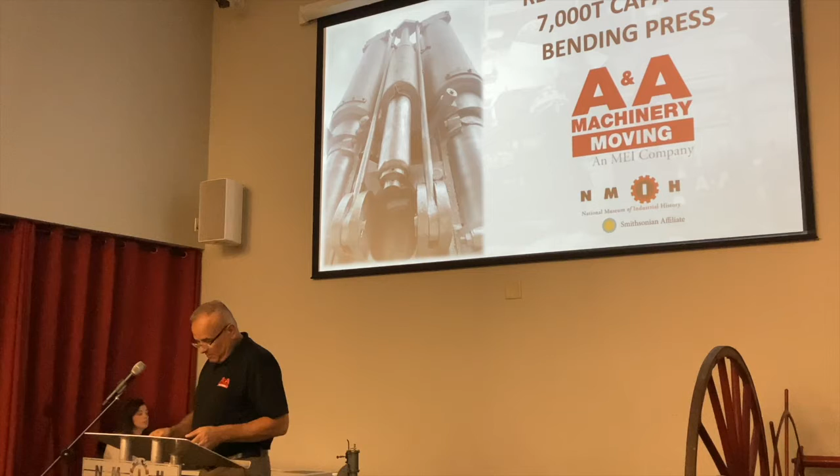Mike, thank you for the history. I've learned some of the history as we were going through relocating the press, but I was excited today to come and learn more of the history about what was going on. So that said, we're going to advance through the first 3 slides because I think Mike covered it pretty good.

As we talked about earlier, the press was in the traffic circle over there outside of the Sands Casino, and it was about 100 feet from the entranceway to the casino. So talking about the way that they were going to move the press or scrap the press would have caused a lot of disruption. If anybody has ever seen using an oxygen lance or cutting a heavy piece of metal like that, they probably would lose vision of the front entrance in that process because of the smoke clouds that would come off of it.

The proximity to the front of it was an issue, and then also getting it through the facility. Go ahead and advance to the next slide.

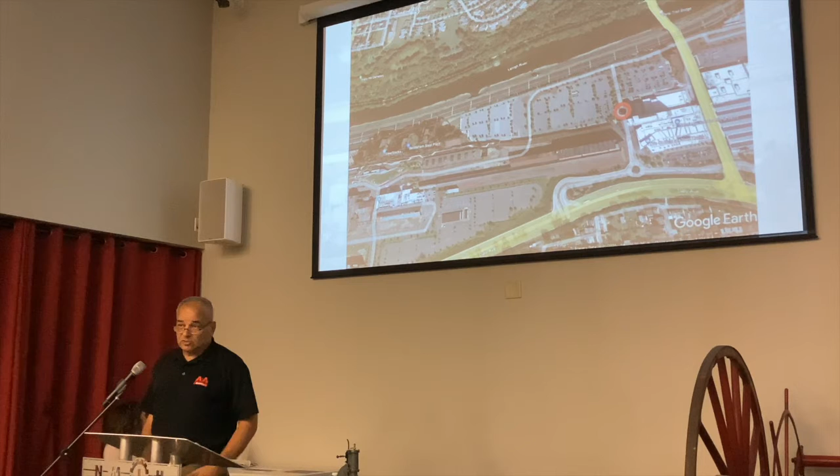So we were starting, I'll try and stand off to the side, maybe that'll be a little bit better. We're starting from the traffic circle over by the press, and then we were going to move here to the museum. One of the important things of moving it is we couldn't get on a public road because of the amount of weight that was being moved and the load on the streets and stuff. You couldn't go over any bridges, couldn't do. So I know we were originally talking about a couple of different locations of possibly moving the press to, and the location here was the best for us to be able to move it to.

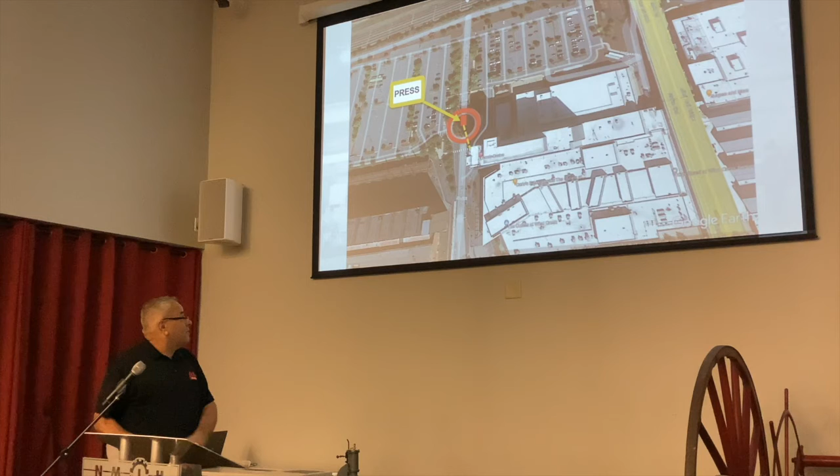Go ahead and advance to the next slide. This is the existing casino location, and I would say everybody that's here is probably familiar with it. Next slide. And there we are. You can see the proximity to the entrance to the casino. Next slide.

We talked about the press earlier, and there's different components to the press, and we're going to break that down. This is one of our original meetings. This was shortly before we met with

Wind Creek Casino, and I'll elaborate a little bit on that meeting. I think it was Andrea, Kara, and Charlie, we went to the meeting, and they had a team of engineers there to tell us why we couldn't move the press and how we couldn't move the press. They said the ground impact as we passed the different buildings here would affect the buildings, and if we picked it up with the forces on it, the crown would crack and break.

It already had some cracks in it. And traditionally, when you're taking a press like this apart, you're taking it apart to put it back together. So you have to take the crown off of the columns. And if it twists at all, or as this one sat outside in the rain for 20 or 30 years, there'd be a lot of corrosion.

It won't come off the columns easily. But we had come up with a technique to go ahead and cut the columns and be able to weld them back together. It wasn't going back into production, so that gave us the ability to do that. And so we were able to pick the crown with the columns, which didn't require that extra force.

For example, we did the 3,000-ton press over at Lehigh, and we ended up with 12,000 tons of jacking pressure to get the crown to come off of the tie rods. And that was a press that was in operation up until they shut it down. So some of their arguments would have been valid, except they didn't have alternate approaches of how we did it.

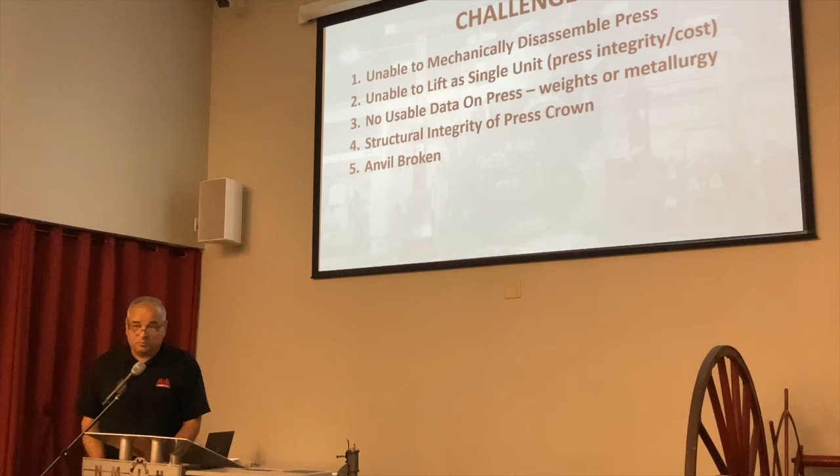And then materials. So we didn't know what our materials were. We didn't have any documentation. So different welding procedures - you can't just weld to anything. You have to know what you're welding to. You have to have a certain procedure.

We asked Lehigh Heavy Forge to send over the metallurgy people. We took some samples out of it. They did some sampling for us so that we could determine what was the carbon content, what was the material that we had, and what welding procedure we could weld to this to have it stick and work. Because for any of you that know, you can weld a piece of steel to a piece that doesn't match and hit it with a hammer and it'll fall off - let alone pick up 100,000 pounds with a lifting lug that you're welding on.

And then routing - we had to come through, and it was difficult how we were to get through. We went through 2 shops here. It was a real narrow passage, and they were concerned about the weight, the concentrated load of the heavy crown affecting the foundations of these buildings that were barely standing on their own. You could see, I looked in the buildings and you could see it shifting, the building shifting on the foundations. But thanks to the team, they had engineering studies done and everything that proved that to be safe.

And then the media event - we're 100 feet from the front door of the casino, and we have full surveillance every time you do everything you do. But it worked out well.

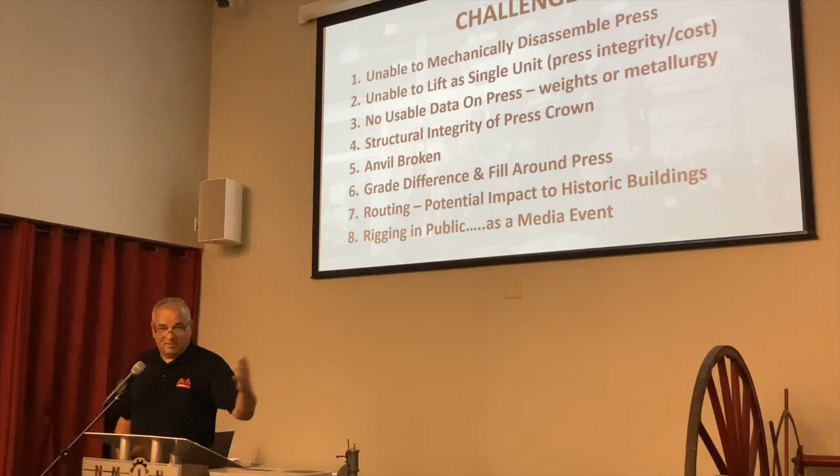We kind of had a pen area where the newspaper reporters and people were. Tony, sitting in the back on our team here, did me the favor to come and manage that so the team didn't have to manage doing the job as well as answering the questions. So it worked out well.

Next slide. So here we're talking about the components. For those that don't know the components, here's the crown of the press. These are the cylinders and rams. So the rams would be the black part, and the cylinder would be the piece up in the crown. So the crown is a big block on the top, and there's actually cylinders inside there that is the piston. The moving crosshead, that's the piece that does the work.

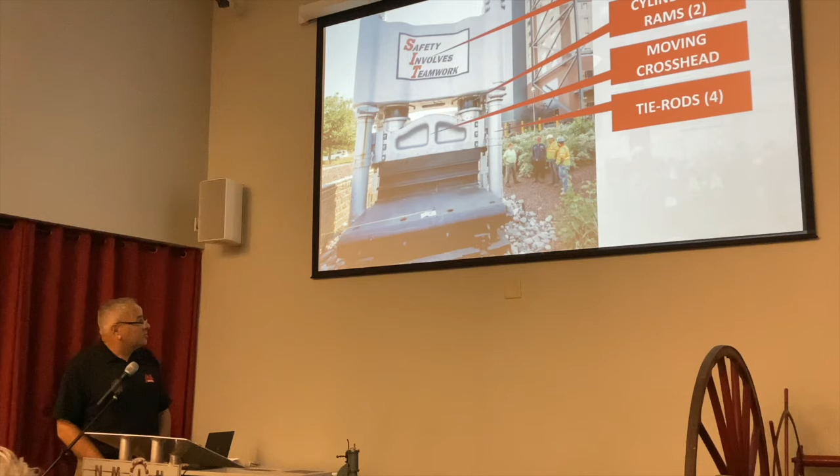There's 4 tie rods or columns, and they actually, at ground level, go in the ground about another 12 feet through the base, which was abandoned underground. So what was the base? Was it a big steel base, or was it concrete and stone? No, it was a steel base. How thick? I don't know how thick it was.

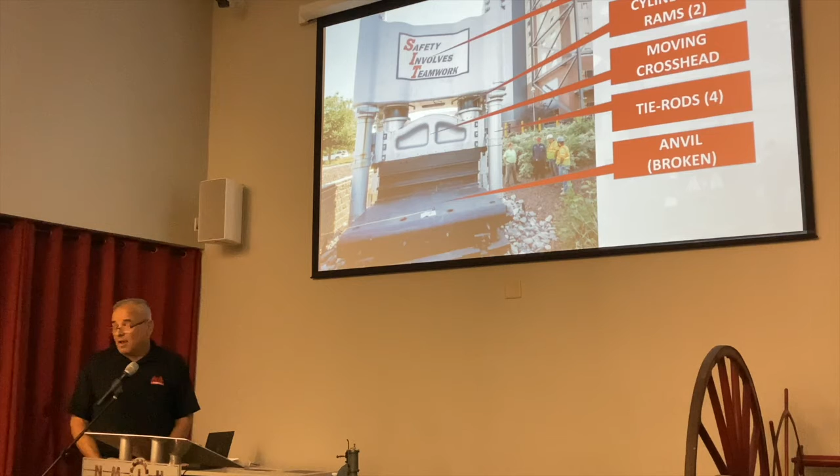We just saw the bed plate on the top of it. It was different. I understand that they may have removed it at some point in time when they built the casino. Yeah, they had to break it up, so they had a team come in, heavy jackhammers. So the anvil is all the work is done on top of. Okay, and then the base, which was below grade.

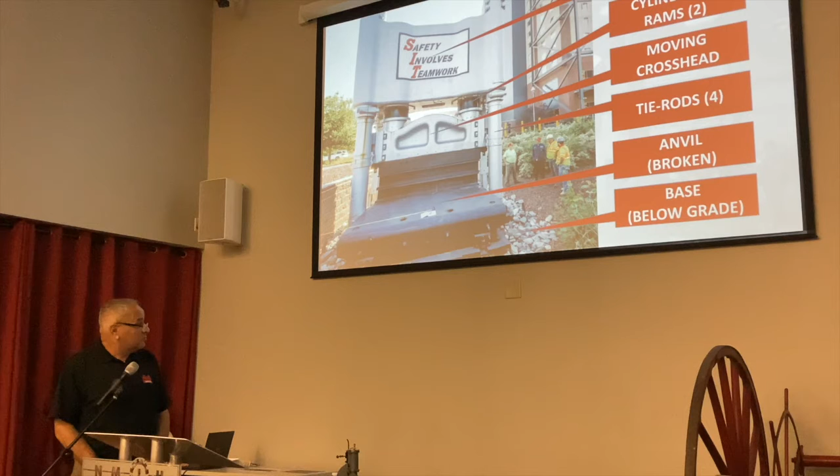If you look out at the unit out here and you look at the concrete, that concrete was made in the shape of what the base would have looked like. The upper nuts, the next intermediate upper nuts, the lower intermediate nuts, and the bottom underneath the ground would have been the lower nuts, or the bottom nuts.

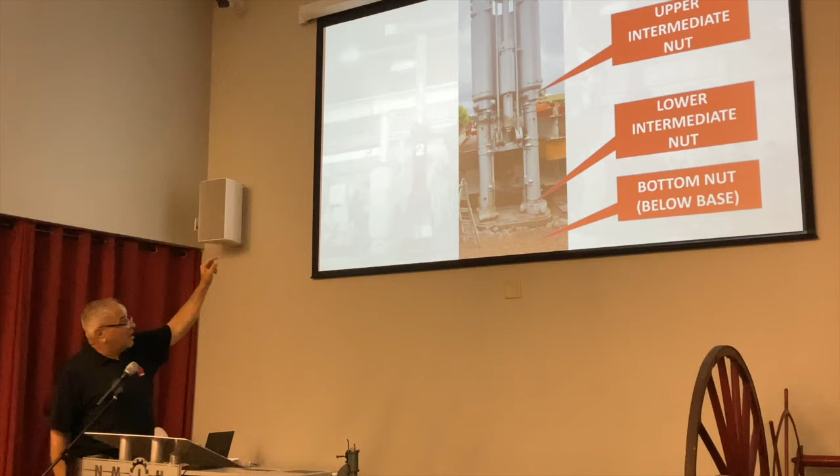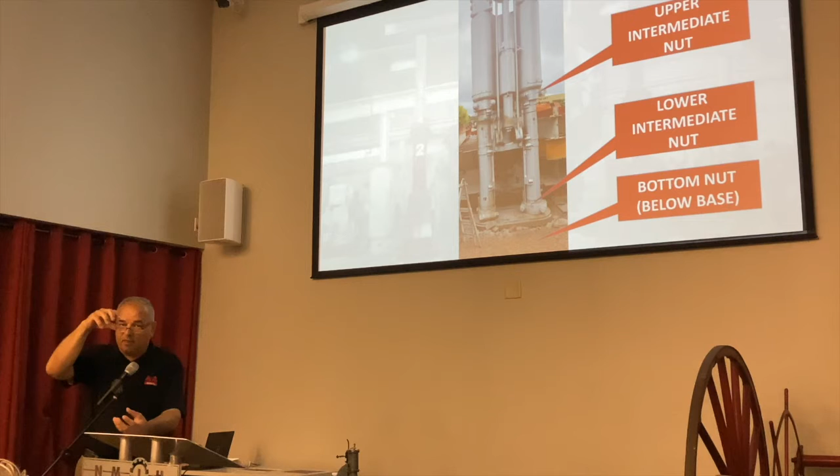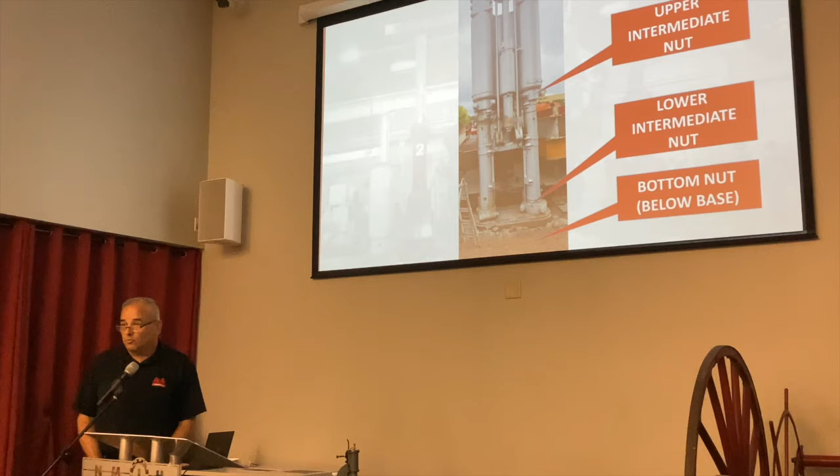So what you're looking at normally in a press assembly, between the upper nuts and the intermediate nut, the way they tighten those up is they heat the rod until it grows. They'll turn it by hand or with a big bar until it tightens, and then they'll let that cool, and that shrinking of the tie rod would create the torque associated with tightening that bolt. They don't have a wrench big enough to put on that nut and turn it and get the tension, so typically they're heating it. They had holes drilled through these tie rods that you could run steam or heat through to heat the tie rods up. Okay, next slide.

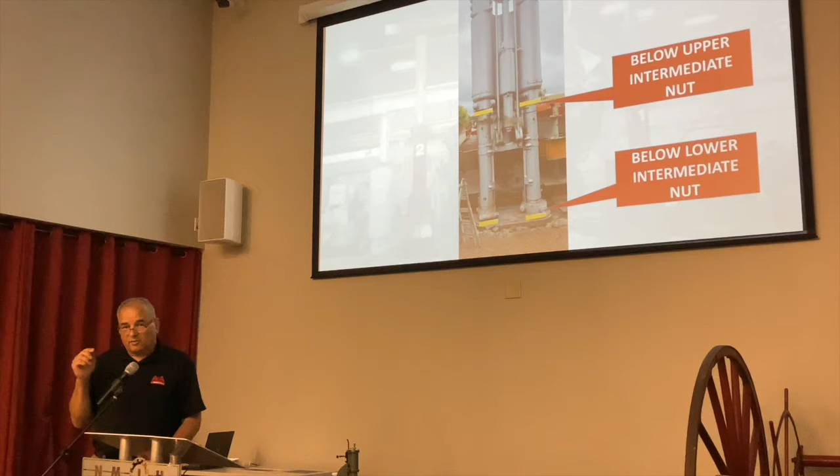So this is where we made our cuts with a wire saw. A wire saw is a steel rope impregnated with diamond. They take that rope and pull it across, and you'll see that. Because the diamond is harder than the steel, it will abrade the steel and cut through it.

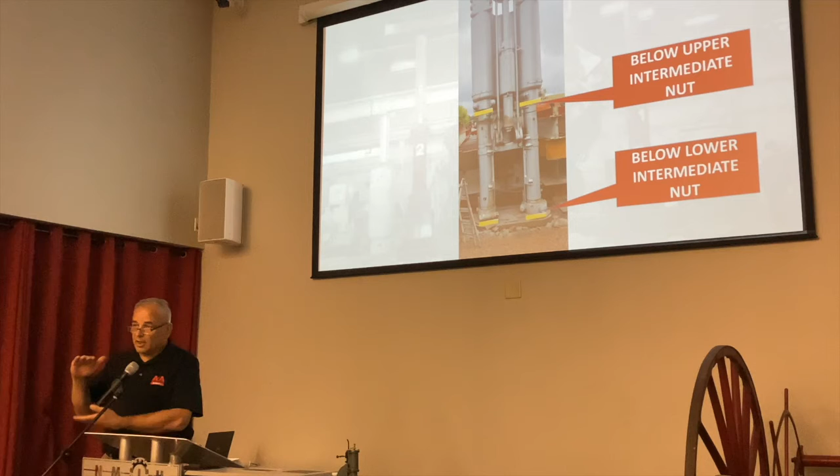Typically you would cut that with a torch, but we had to reassemble it. To cut it 18 inches thick with a torch, you end up with a 6-inch gap. You would destroy the piece of equipment.

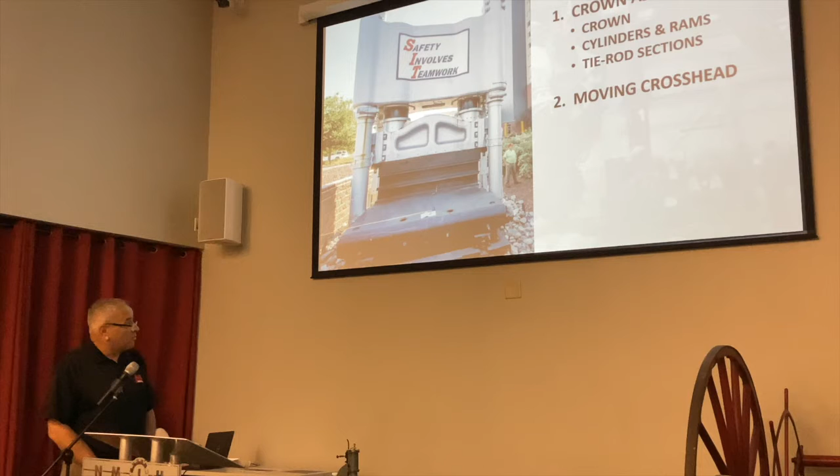So the press components: crown, cylinders, rams, tie rods, moving crosshead. Tie rod sections, there were 4 sections that we kept. The anvil, which was broken, had a big crack right across the middle. You could see just a little bit of it in the bottom right corner underneath the beam skin.

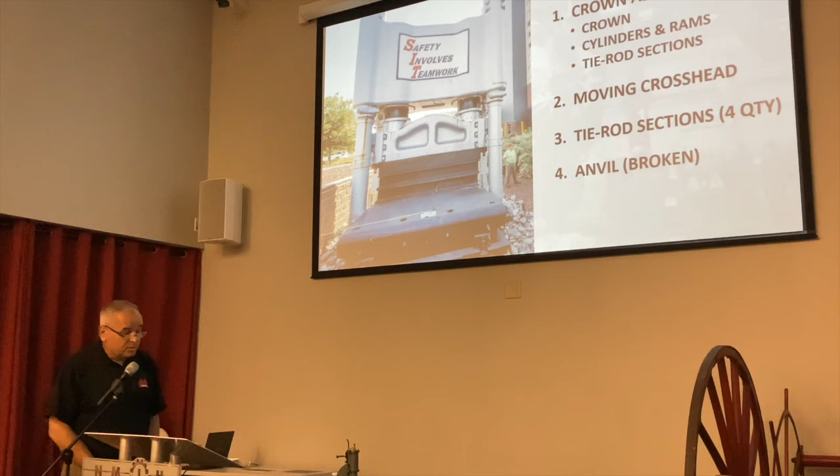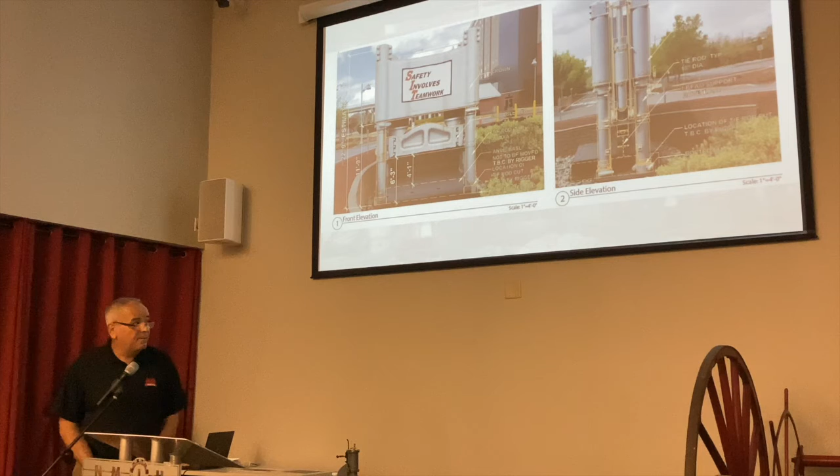This is some more drawings. Again, there was another contractor used for developing the park, I think Simone Collins, and they did some studies here.

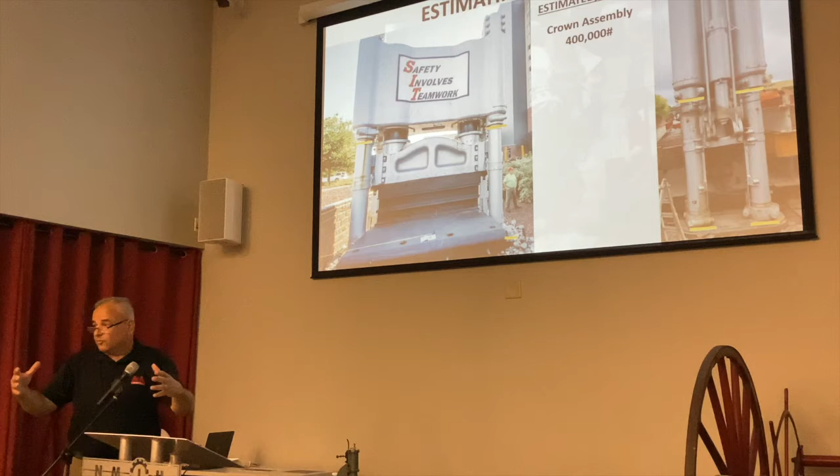These were the estimated weights versus the actual weights. We don't have a drawing to work from, so it's a matter of going up there, measuring the parts, looking inside, saying okay, there's a hollow cavity up in the middle of this, and that's approximately this big. We estimate around the columns there's a gap of about, even though we can't see it, this big. So you take all those little pieces, put it together, and calculate your weights. We estimated 400,000 pounds.

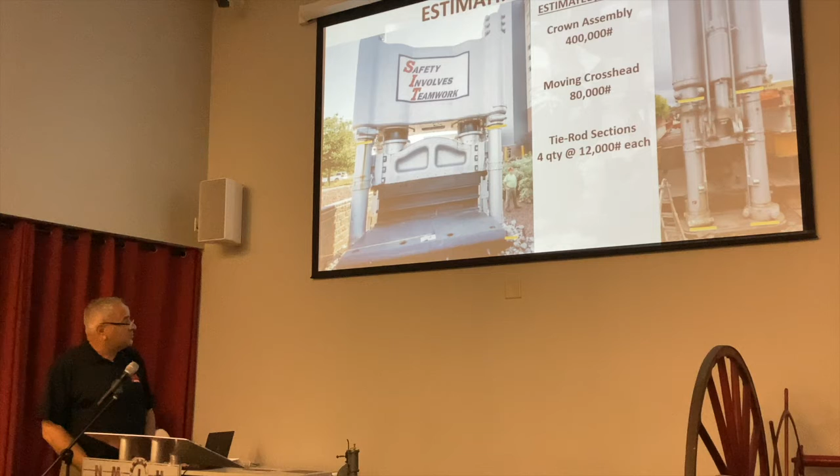The moving crosshead, 80,000 pounds. The tie rods, the sections between the yellow lines, 12,000 pounds each. And the anvil, 158,000 pounds.

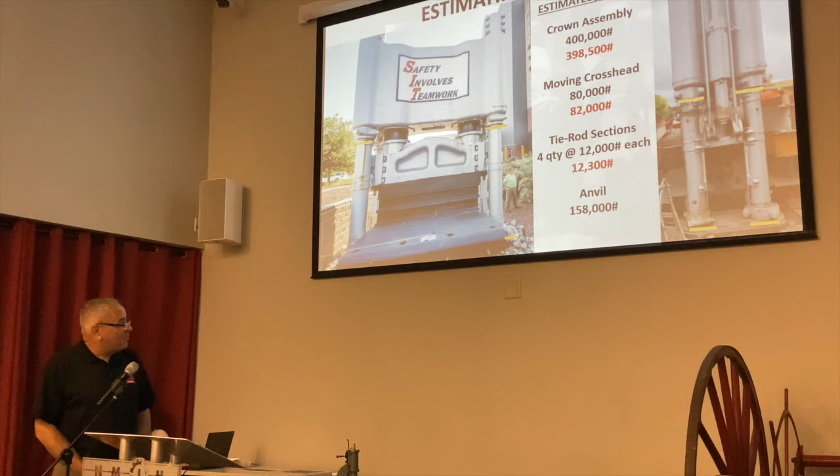Then the actual weights: the crown came in at 398,500 pounds. The moving crosshead, and we got some brownie points for this later on, I'll talk to you about. The tie rods, 12,300 pounds. And the anvil at 156,000 pounds. So I don't know if I was lucky or if we were just good, but it's not normal that you get that close.

On the crane, which handled all the small pieces, not the crown, there's electronic scales on the crane, so we had actual weights. On the crown, we used our hydraulic gantry. We can read the hydraulic pressure to give us what the weight of the crown was.

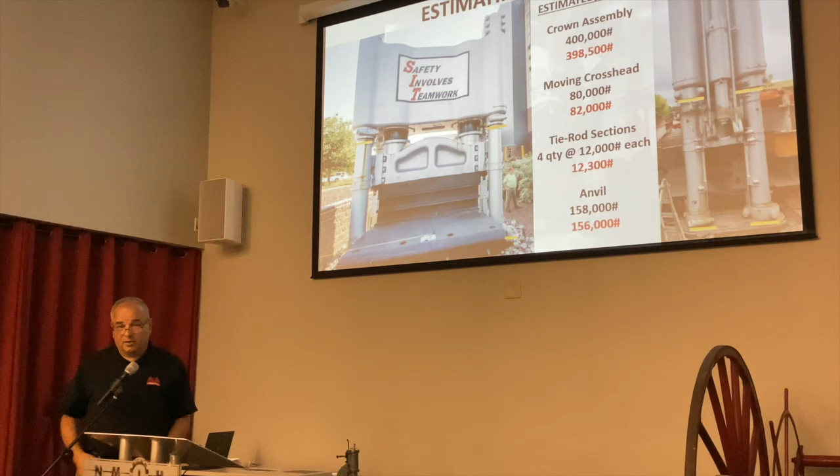Again, you heard the conversations earlier about cracks. These straps that are on there are to hold the press together. These would have all been done during the operations. If they're offloading the press and don't have their forging right in the middle, and they have it off to one side, Jim knows what this is all about. It causes all kinds of forces and pressures on the ground. This was cast, so it does break, it doesn't bend.

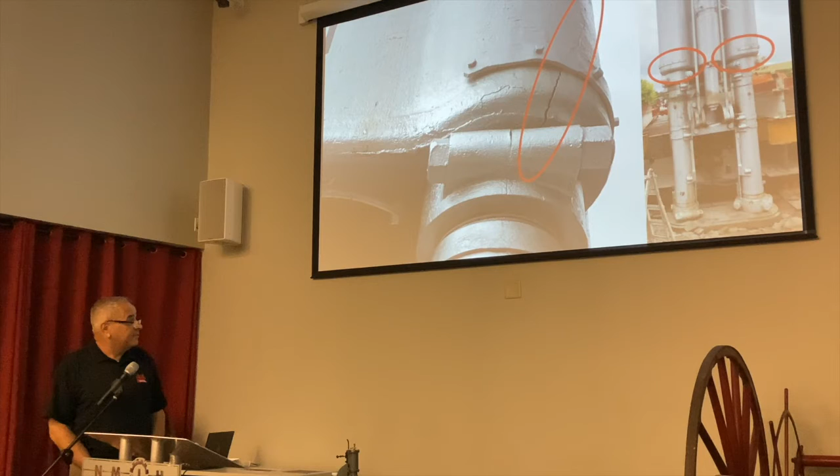Pieces missing. So the wire sawing, that was key for us to be able to do this project. Wire sawing isn't traditionally used for cutting steel, it's used for cutting concrete. But my thought process is inside of all concrete there's steel rebar, so they've got to be able to cut through steel. So I reached out to a wire saw company and they said, yeah, no problem, they could do that. It's amazing some of the stuff that they do when they cut.

One of their projects, I'm going to side rail here for a second - they were doing stacks on cruise ships, and every day that the cruise ship is in the dock, it's $1 million that they lose. So they were changing the stacks, so the guys would go on a cruise and cut the columns. They'd run on 2 engines and not 3, and they would cut it, weld pieces together so that when they got in port, they could just lift the stack out and save like 2 weeks on their schedule. So they had crews out on the ocean cutting out one stack while everyone was cruising.

Understanding what the material was, was important. So we cut below the intermediate nuts. We did 4. They were 18 inches. The tie rods were 18 inches in diameter, so it was an 18-inch cut.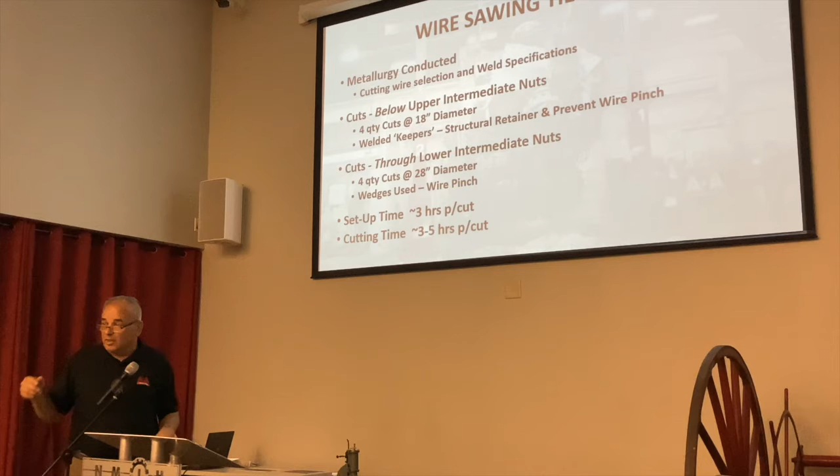Then we cut right through the bottom intermediate nuts, right at the lowest part above the base. So we cut through the nuts and the tie rods. We welded some blocks in there to stabilize everything, because you don't want to cut it all and have it not standing up. We welded blocks and drilled holes through those blocks so they could pull their wire through, cut the column, but still have it held together.

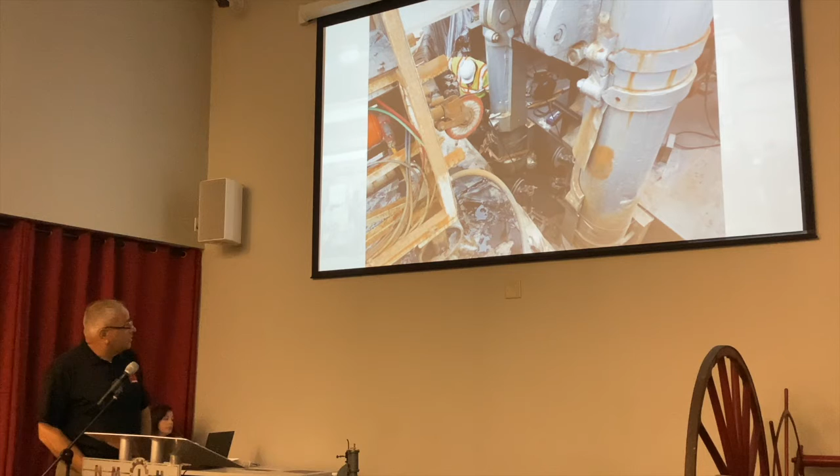This is the wire saw. So this saw is running, and they're running water on the cut when they're cutting it. They weld these pulleys into position so they can make the wire go where they want it to go.

So there are some of the blocks that we welded on the columns. Again, we had to know the right material, the right weld procedure.

That's actually the wire, or those little nubs you see are the diamond impregnated parts of the rope that the wire saw uses. It's probably going 50 feet a minute.

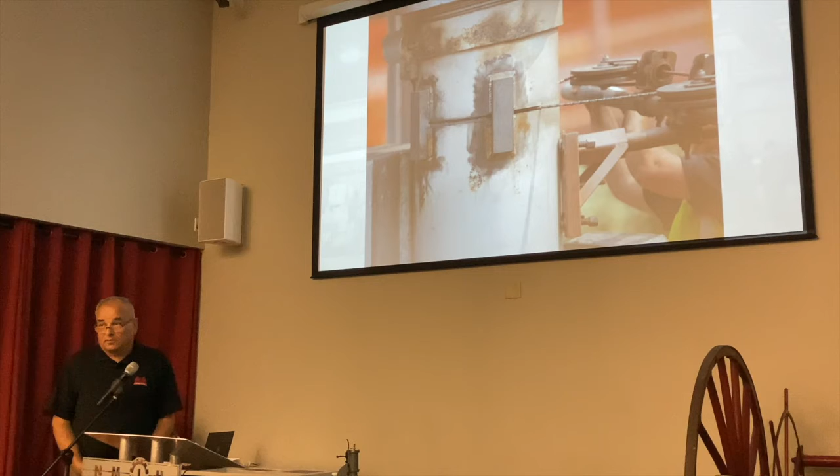We just wire sawed a 400-ton extrusion press apart. We finished that project a few weeks ago.

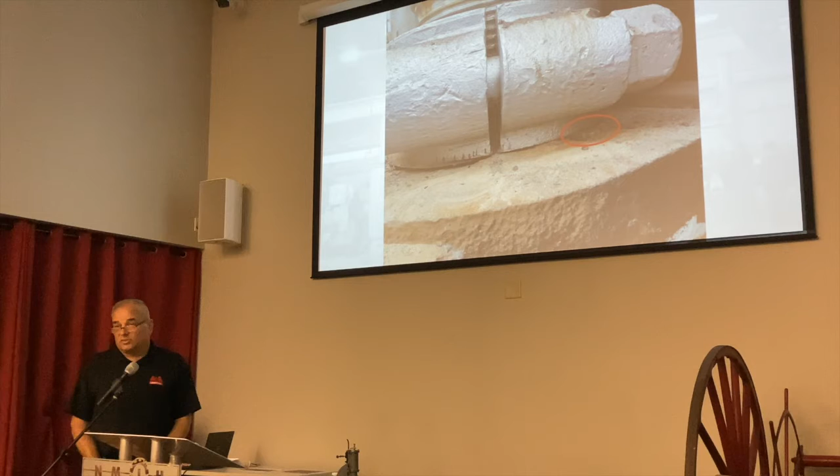Here you can see in the circle there's a steel wedge. As they start wire sawing through, just like using a chainsaw on a tree, your saw's going to get pinched. They would drive wedges in so the piece would settle on the wire, and they could continue and cut through the other side.

This is a short video. It would take 3 to 5 hours for that cut, and 3, even 4 hours to set up the cut.

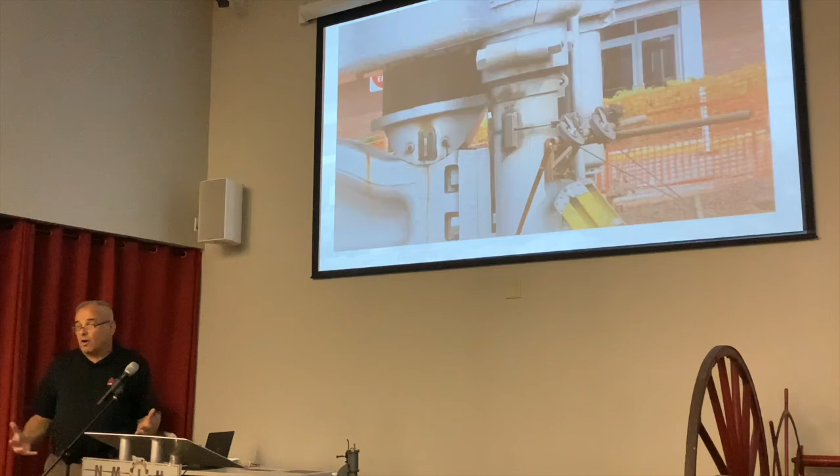So as you can see, now we're stacked up, and the press - we've got the moving crosshead blocked up, because once we start picking pieces off, it could topple over. It's only sitting on those beams.

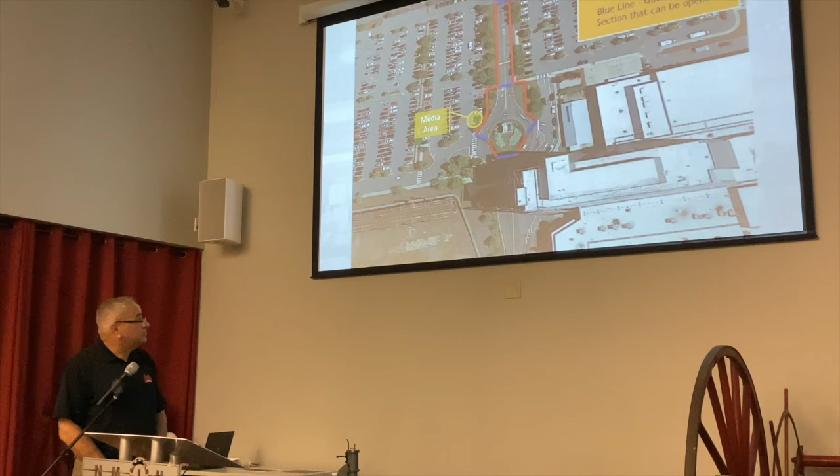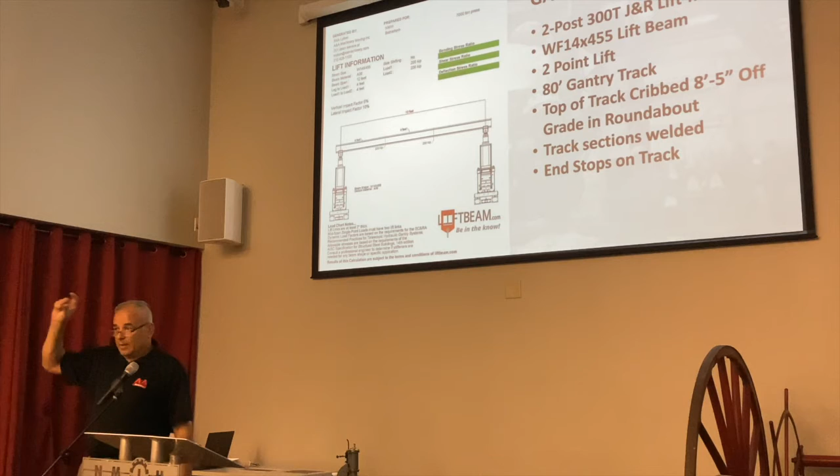We talked about this next. So this is a hydraulic gantry - a post and a post that has a hydraulic cylinder in it, and you pick a different beam for your capacity to go over top. This is a 300-ton, 2-post hydraulic gantry system. It can pick up 300 tons based on the right size beam and the right rigging hanging from it.

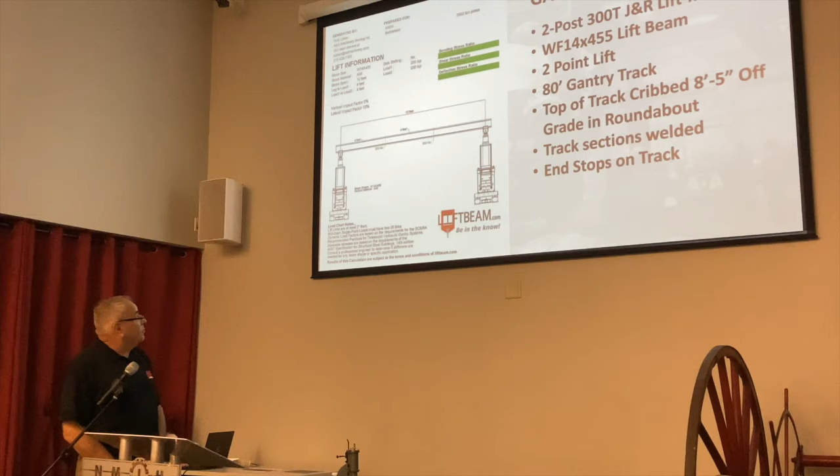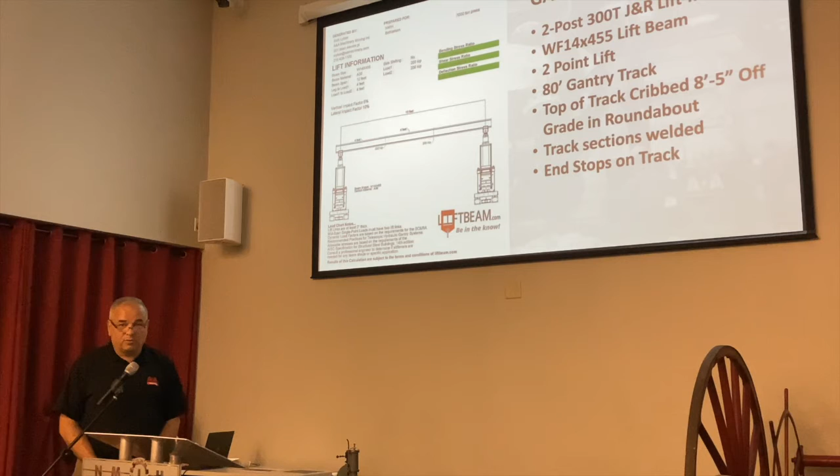So we go through our beam configuration to make sure our beam is strong enough, and 3 greens means we're good in every way. We'll run those calculations through software to make sure the beam will handle the loads. The width of the crown, the spacing of the columns, all affect the structural integrity of the beam.

We had 80 foot of track. We had risers - we'll see that a little bit.

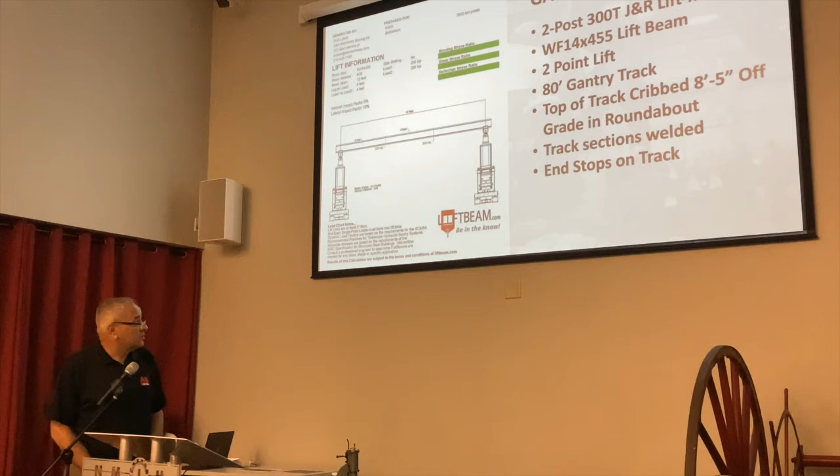So here we were dealing with different elevations. We were in the bottom of the traffic circle and then up to the roadway, and then we had to create a bridge to move it from one place to another.

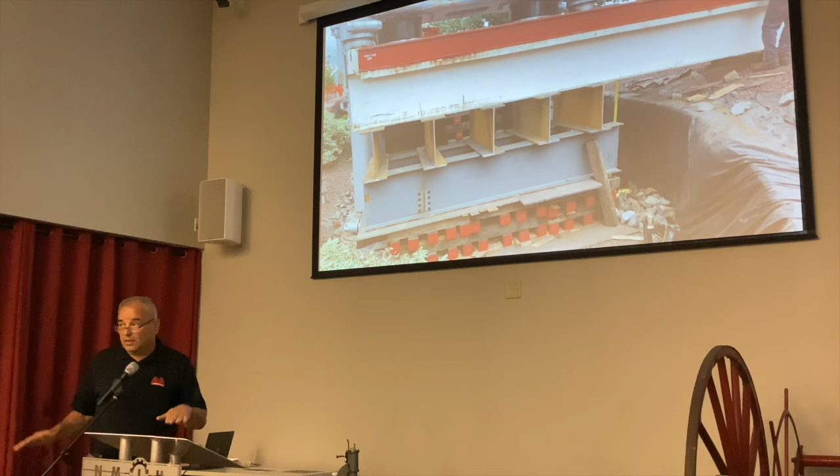We used cribbing and 1-inch plate on top of the cribbing to give us a flat level area, because we didn't start with a flat level area. Then we put the steel beams, welded them all together, and put bigger beams on top. And then the red on the very top is our gantry track sitting on top of the structural.

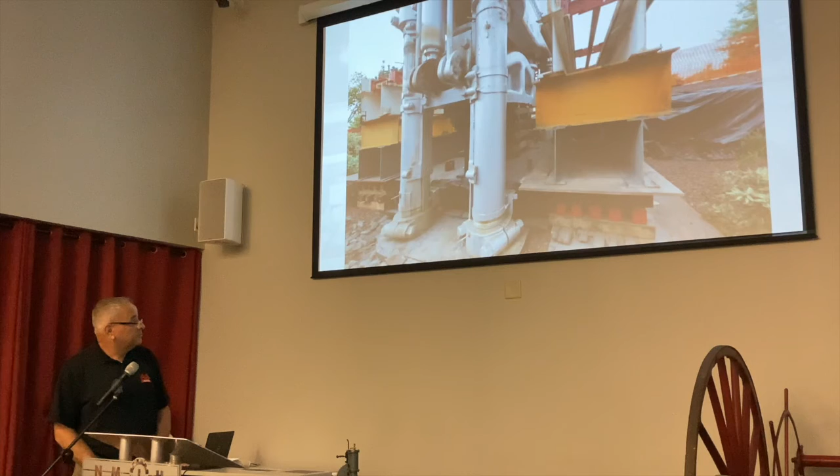Just some looking at the press from different angles. This is prepped and ready to lift.

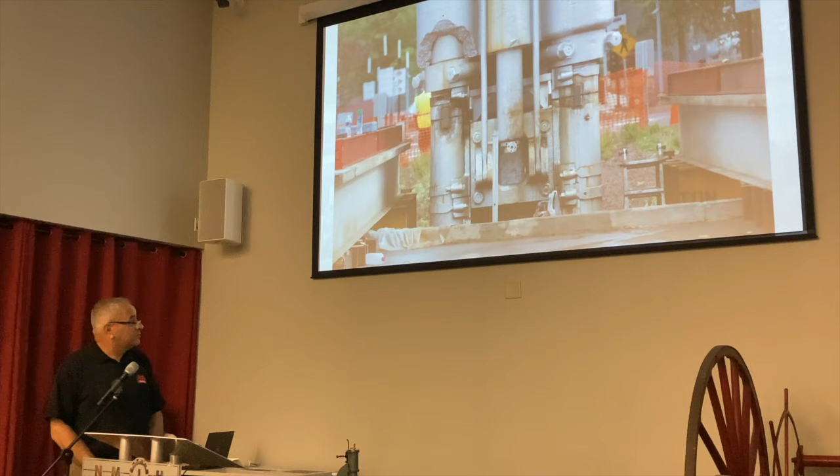We're setting the gantry up at this point. So you bring the gantry posts in - each post weighs about 18,000 pounds.

Put the beam on top. They're making the mechanical connection on the top. You can see we use different beams at different elevations, and we swapped our track as we went down, once we picked it up.

Another thing we did is we picked this with one sling. So we started on one side over the rigging, down underneath, over the other side, down under the rigging, back through, and connected it all together.

So it was equally loading the whole crown of the press - just picture it was cradling, slinging the whole thing. We didn't have one sling to this corner, one sling to that corner. We basketed everything all the way through to help equalize the loading.

We had no real concern about the press crown breaking, but this is just another added safety step to basket and sling it. And it wasn't easy to manage that.

9-part, 1-inch, 50-foot long sling that probably weighed 4,000 pounds.

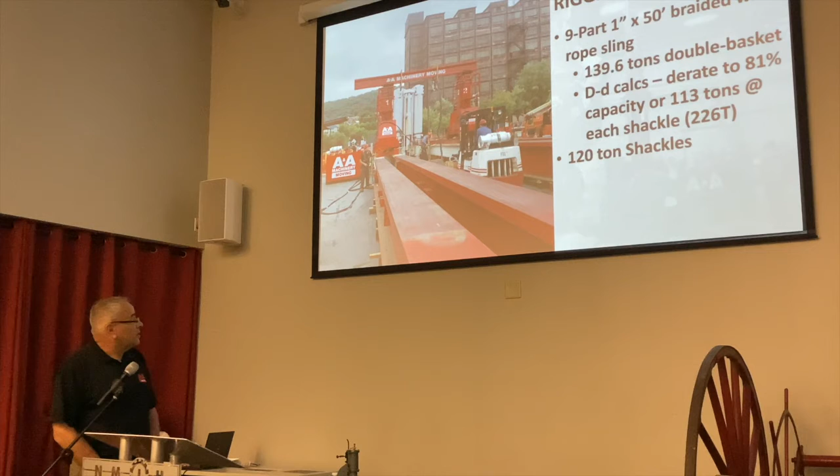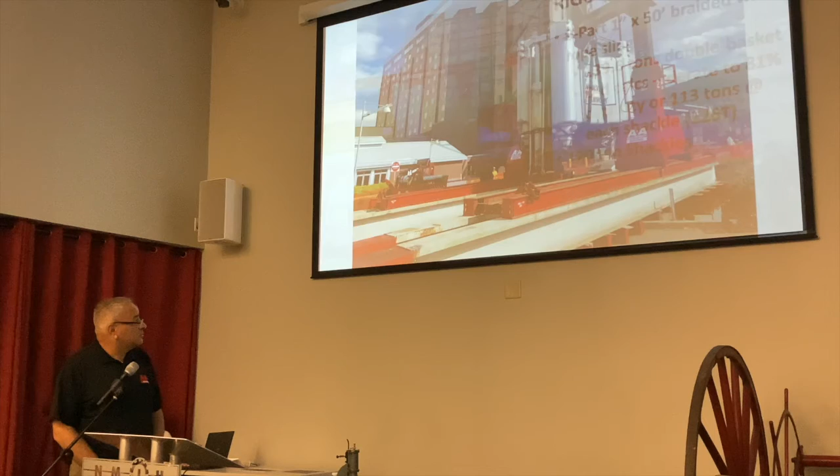So here's another picture. This is actually after we were already lifting and we're off of the press crown. We're traveling with it at this point.

The next part that was a challenge was getting the right trailer to move it. Because of the length, if you used a standard trailer on the road for moving something this heavy, it would be called a 19-axle dual-lane trailer. It's called dual-lane because it takes up 2 lanes of traffic, and 19-axle because it has 19 axles front to back. It'd be a 175-foot long trailer plus the tractor, and 18 feet wide going down the road.

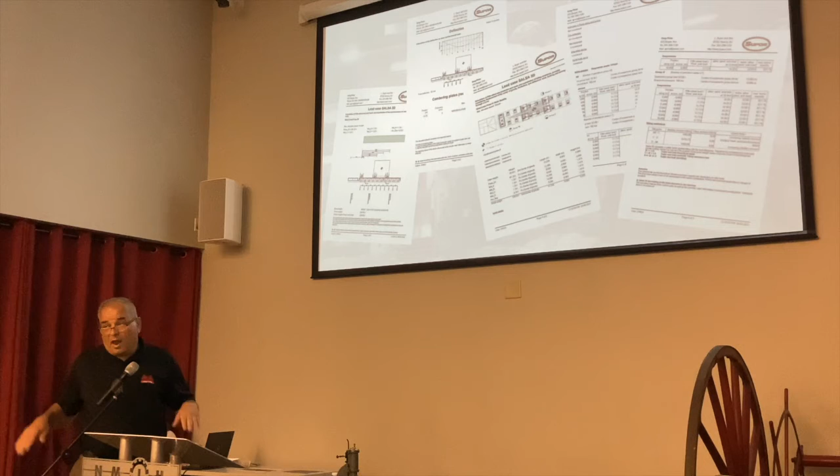So you need something with that much capacity and a much smaller footprint, and that's called an SPMT, a self-propelled modular transporter. This is the trailer we picked for the job. Every axle hydraulically self-adjusts, every tire steers independently, so they can crab steer and walk the whole thing sideways. They can turn all four and turn it within its own footprint.

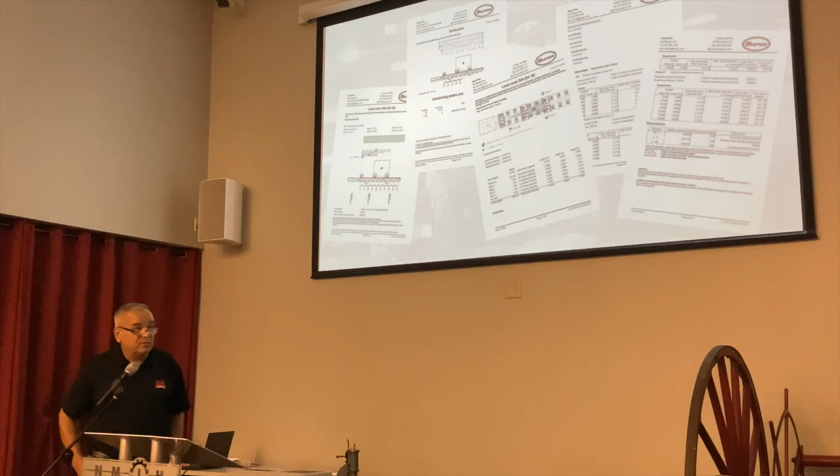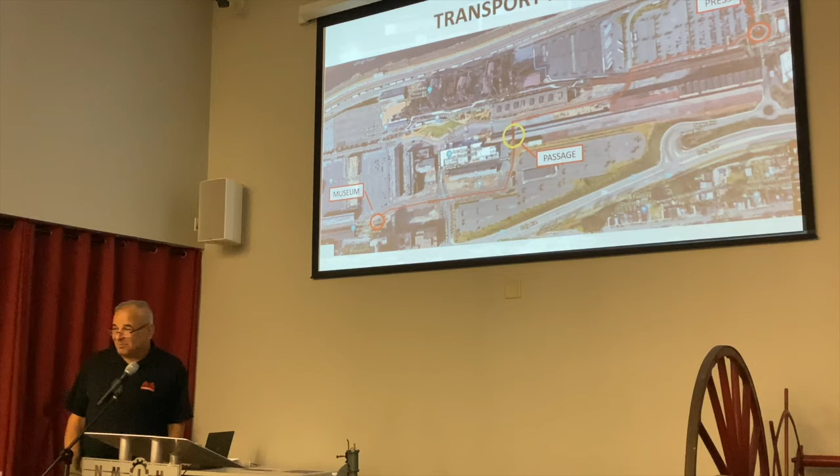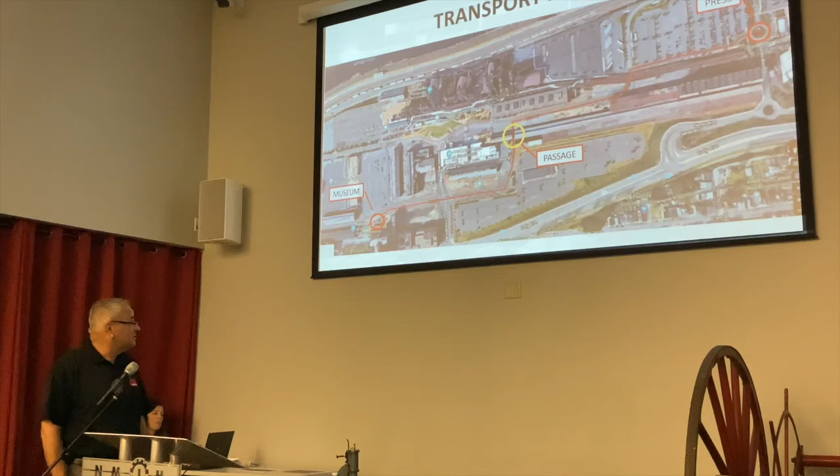And so this is our route. We took the press out, came through the passageway, a really tight area, came across. Originally they asked us about traveling right through the area where most of the events are, where there's all the cobblestone. I said no, we're not driving across the cobblestone, there's only sand under those cobblestones, it's not gonna happen. So this was a separate study to determine that we could drive through between those two buildings. That was the spot we had to go in and go through those buildings.

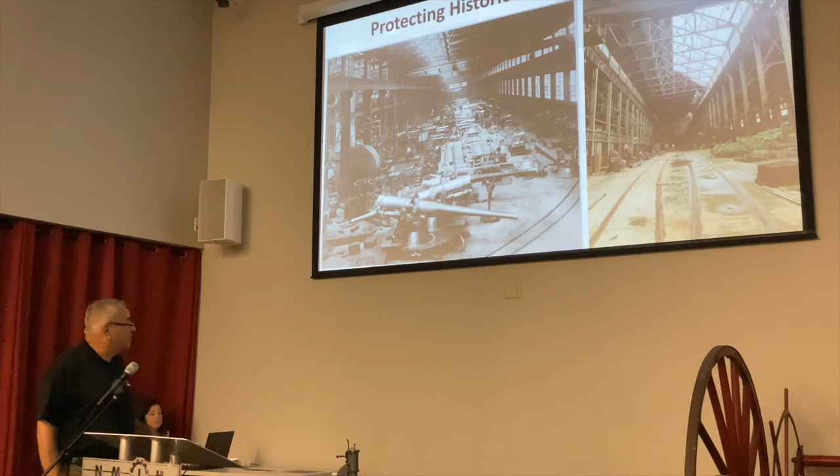Next, and of course to the right is the building — I won't say today what it was, but a couple of years ago — and this is that same building in its heyday.

There were some bolts put in sometime in the past, but not knowing the integrity of those bolts or anything, we didn't want it to break and just fall apart. So we positioned those lugs to pick up evenly on those 8 lifting points, and again welded those down — needed the weld procedure to be able to do that.

So we had to put the press crown in first and set it on the ground behind where we were going to build the press, because we didn't have room to bring the press crown in second — it would be way out in the street on the trailer. So we unloaded the press crown, set up our gantries, set it on the ground in the back, same assembly, put the rest of the pieces in with the crane, and then brought the press crown back.

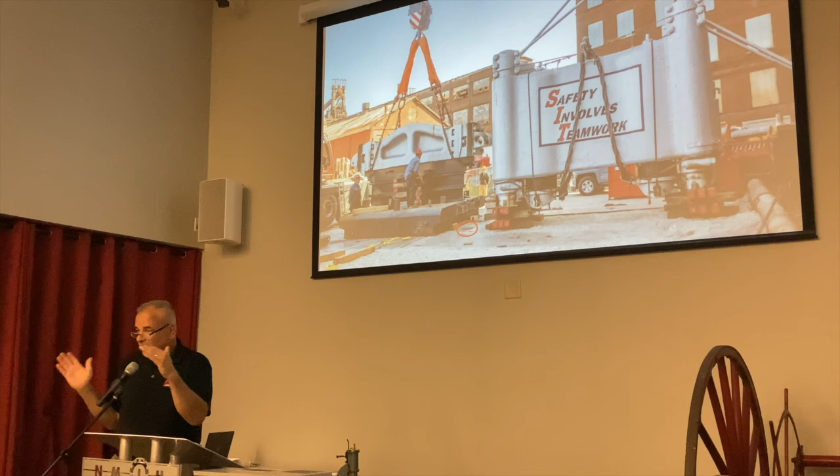Is it reinforced, the concrete? Does it have steel in it too? Oh yeah, yeah. Right underneath where each column sat, there's a steel plate on top, and they had a rebar cage all through the foundation.

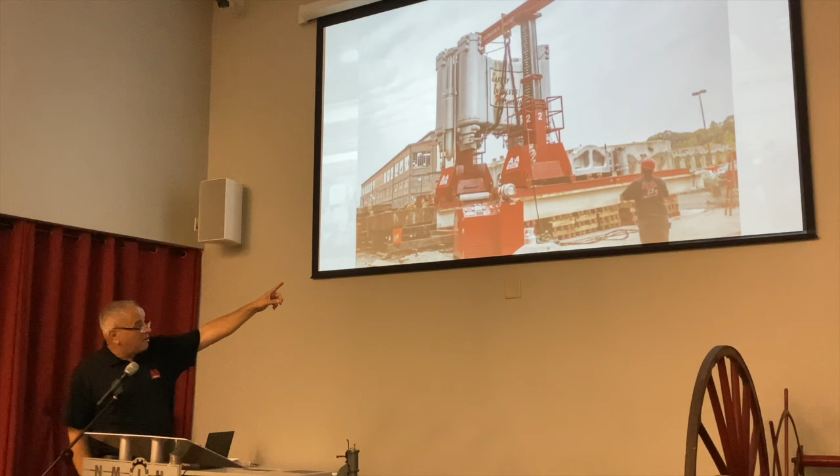So here we're picking the crown now and moving it back onto the assembly we did with the base and the columns. You can see to the left there, the moving crosshead is there, the columns are stacked back up, and they're all just standing there. We're doing a press project for a couple of automotive companies, Tesla, BMW right now.

That's literally what they call it, stacking, because you just stack the press parts, they don't bolt together, you stack them, and then they come through and tighten them up later on. So we've got 11 presses around the country that are up to 1.4 million pounds, and new stuff coming in from overseas.

Is that the mega press I keep reading about? I don't know what the mega press is, but the Giga press, they call it. Giga press, okay, makes the whole car body.

The biggest press I've seen is Wyman Gordon up in Mass, a 46,000 ton closed die press. I can't remember how heavy it was, but the bed of the press was as big as this room and wider. It was huge, and they were forging the parts behind the guys in the fighter jets, I forget what that's called, out of titanium in a single shot.

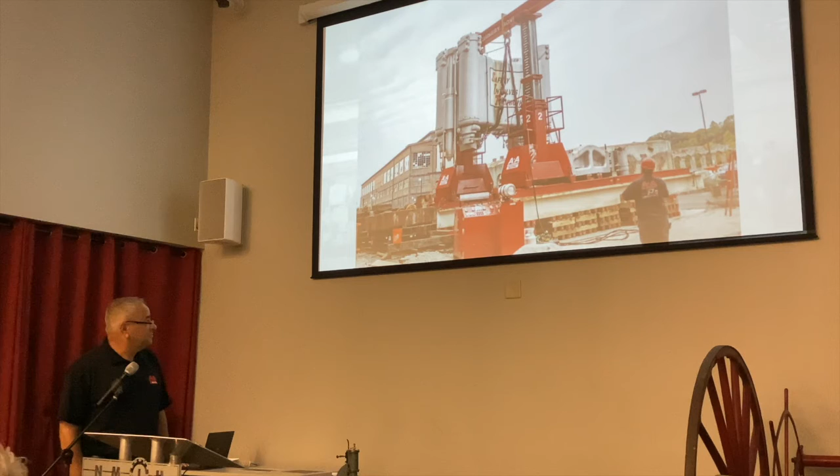So here we are stacking the press up.

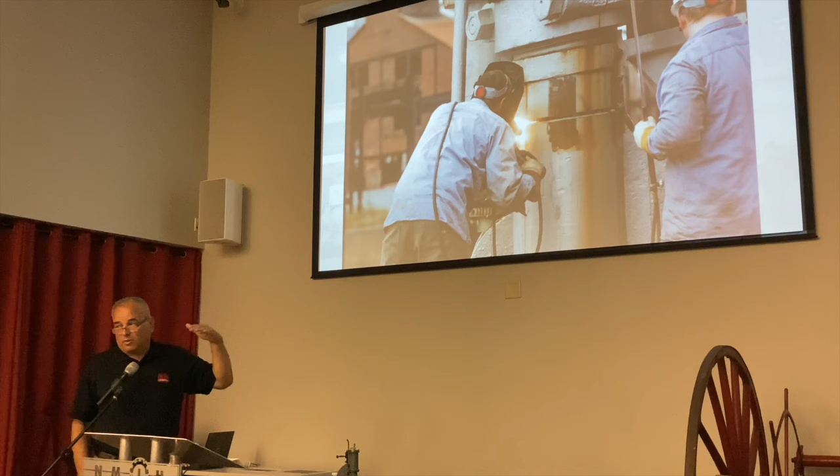And then we brought the welding crew in behind us to weld all the columns. If you torched them, it would not have been easy to re-weld that, so the welding crew came in and welded the four columns.

Things that we had to overcome: avoiding the mechanical disassembly, unable to lift it as a single piece, no usable data on the press, the structural integrity of the press crown, the anvil was broken, the grade differences between the bottom of the pit and the bottom of the circle, the routing around the historical buildings, and rigging in the media event.

We had the opportunity - we're part of an organization called the SCRA, Specialized Carriers and Rigging Association, an international organization of all the large rigging companies around the world. We had the opportunity to enter this project in the rigging job of the year. They have different categories: up to $150,000, $150,000 to $750,000, and the over $2 million category, plus some big transportation categories.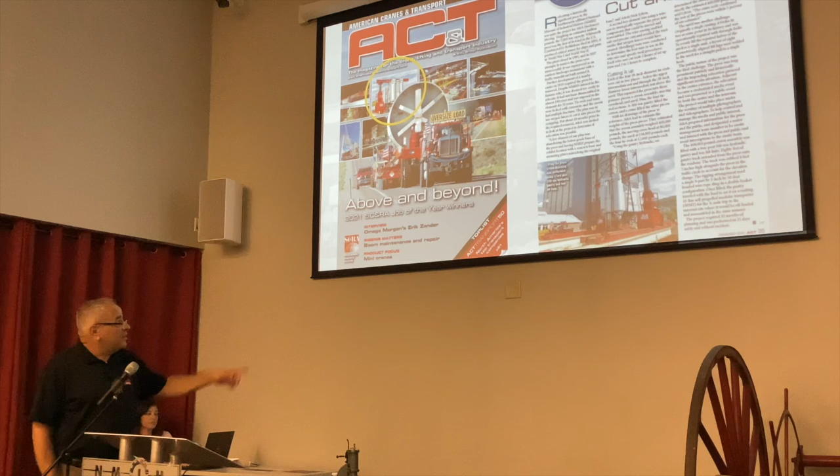Up in the top right corner is the walkway at the Seattle airport, where it went right across the taxiway, so they had to put it up in one night. It was, I think, 2,300 tons. They picked it up in one piece and put it in there. And then this is the feature in the ACT magazine.

Any questions? Where did the trailer with the 10 axles come from? It actually came from New Jersey, a company called Supa. It's something available for our industry, not every company has them, but they are available. They're really made for off-road type applications. That was a 10 line. They'll take 168 lines, bolt it all together, and move big pieces.

Some of the bigger things I've seen moved was an offshore drilling rig. They did the whole drilling rig on the SPMTs, took it out to the ship side, and then used a 10,000 ton barge crane to pick it up. And just for the order of magnitude, the hook on this barge crane weighed 152,000 pounds. Just the hook. So, any other questions?

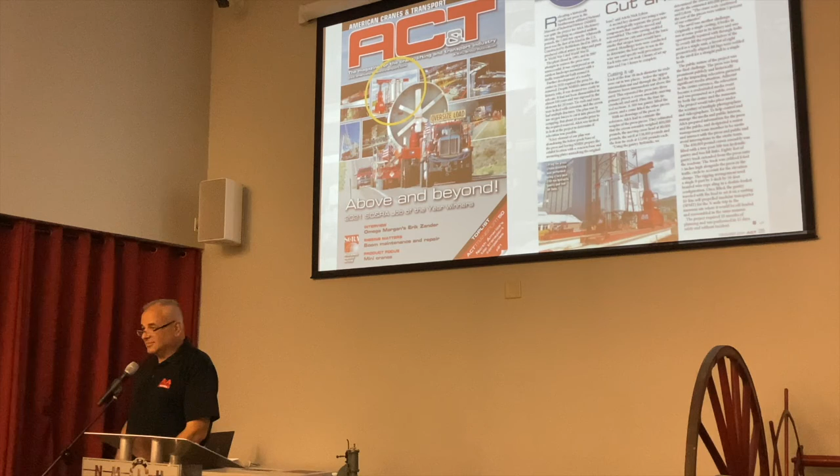Was there ever a point in time that you had serious concerns about whether the project could be completed? No. I mean, was I going to get it done the day that I said I was going to get it done? There was... it's always concerns.

When the wire sawing took 2 days longer, that's a schedule concern. But one of the things Tony had said to me over the years is the success of a job is planned before you start. And if we're not confident in what we're doing, you shouldn't be doing what you're doing. I would say there was no convincing people that what we were doing was the right thing. But no, there was no time where we didn't convince.

When you welded the columns back together, the 18-inch columns, you put a spacer in the middle and weld inside and build it all the way out to make them solid, or is it just on the outside? No, it's just on the outside. We beveled them, and it's just on the outside. It's not forging, so it doesn't see full load. It'll stand up there without a weld on it. As long as there's not an earthquake.

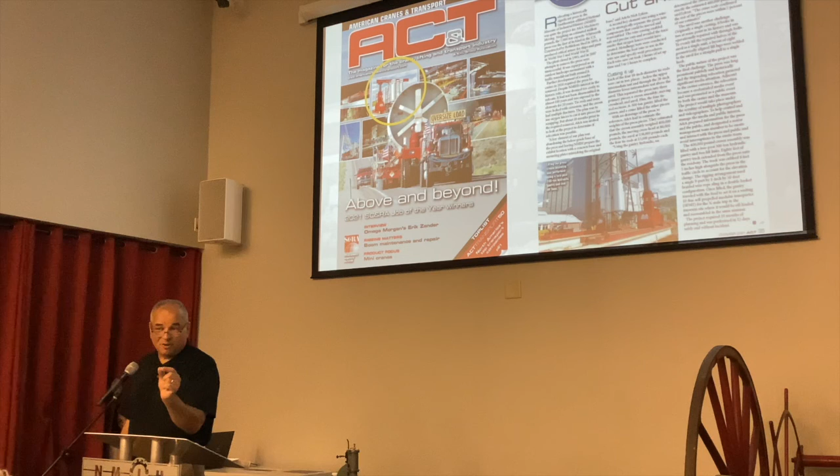Was there a crack in the anvil all the way through? Yes. So you didn't have to weld straps across? Well, there were some bolts that went all the way across, maybe 1.5 inches, installed sometime in the past. But there was a big gap, and my concern was when they bolted it together, there wasn't a gap this big. So were the bolts still intact, or were they stretched, or broken? The way we designed the lugs, it picked it up evenly on both parts, and the force of it pressing against each other kept it up and level.

Wow. Okay. Go ahead, Karen. Sorry, could you just remind me again how you got your start in the business?

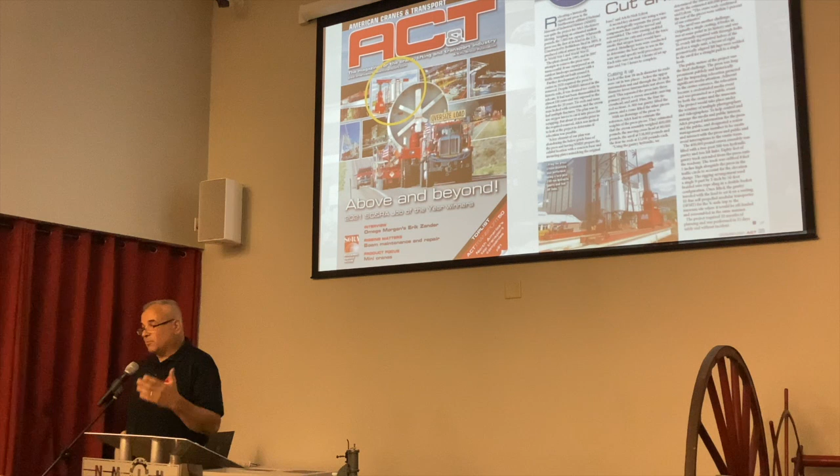I love this. So it was a family business, but we started as bakers. We used to bake for the school systems, we used to make pizza, and we did the football games, moving our ovens from stadium to stadium. My dad was always an auction guy, and during the summertime the bakery was slow because we weren't baking for the schools, so he'd buy and sell bakery and restaurant equipment. Then we started moving bakery and restaurant equipment. I had 3 older brothers, 3 younger sisters, and we all worked in the bakery.

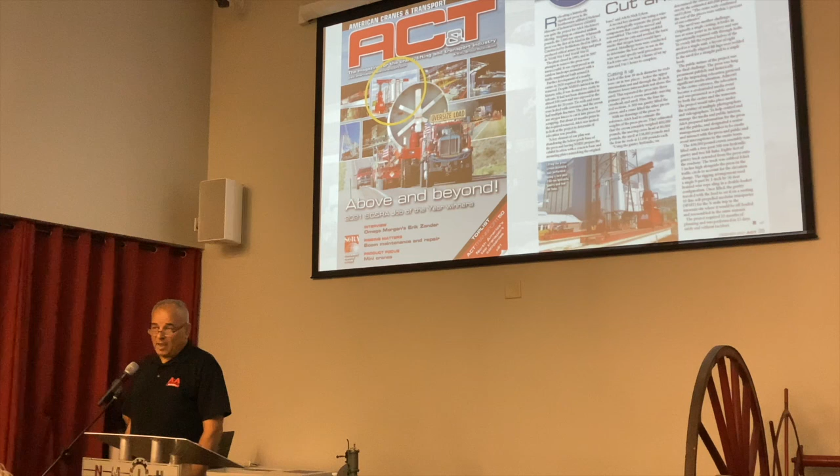I'm the 4th down. As my brothers got old enough, they left — when they got out of high school, they were gone. So before I got out of high school, my dad saw the writing on the wall that there's nobody gonna be left in the bakery business, so we didn't open the bakery up again one September, we just stayed in the equipment business. At that time it was 90% equipment and 10% moving — we were moving bakery, restaurant, and supermarket equipment, and that would have been in the 70s. When I got out of high school, we were really more just moving equipment, about 80% of our business. That was back in '81. So coming up on 41 years doing this stuff.

So we were rolling in the dough back then.

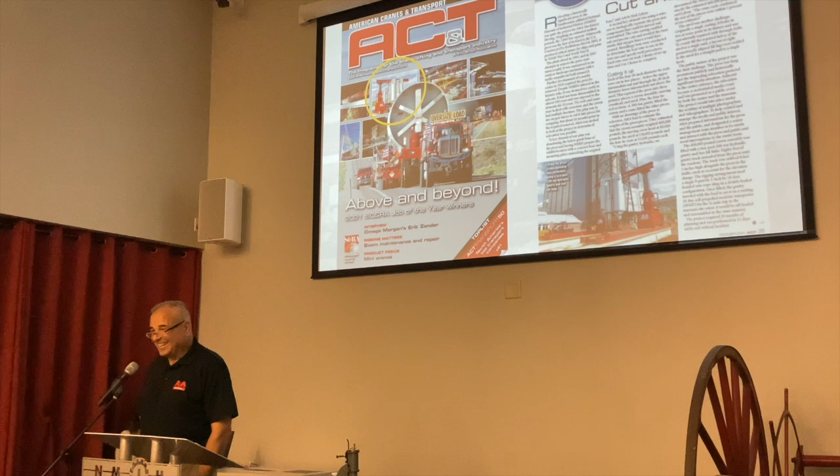Thank you. And this is incredible, so someday when I have grandkids, I'll get...